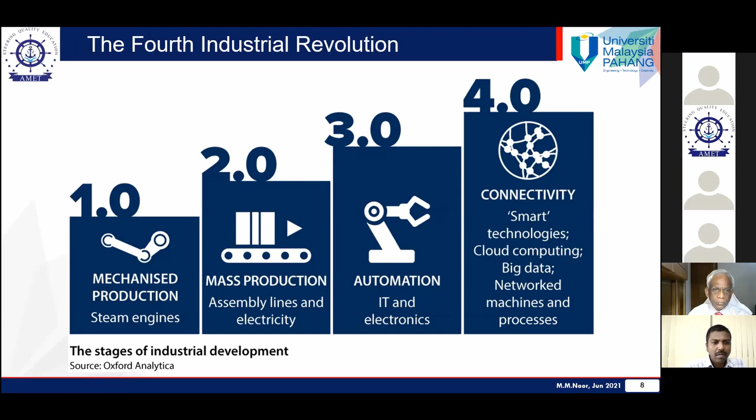An example of technology adoption: if we take a smartphone, it took about 3-4 years to reach 25% of the US population, which is about 300 million. But in old days it took about 30-35 years, like with electricity or the phone. That's technology adoption.

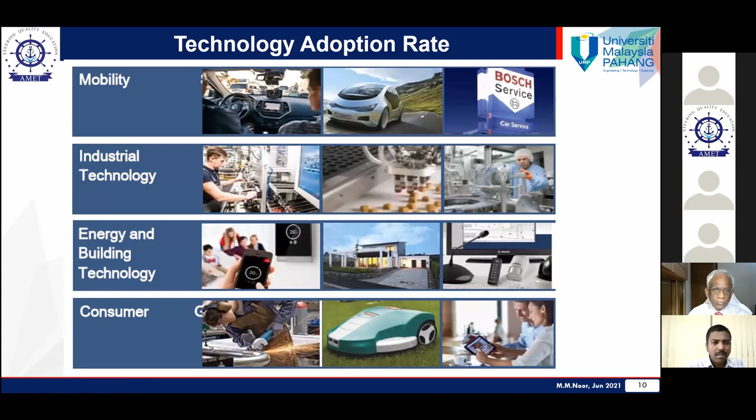Currently, what's next? We are on mobility, industrial technology, energy and building technology, and consumer technology. This is part of the important adoption of technology. The main focus in this area is how we can adapt to man-robot collaboration in our processes, central control, quality, component and material testing, and supplies. Because of this knowledge and engineering technology, we are here.

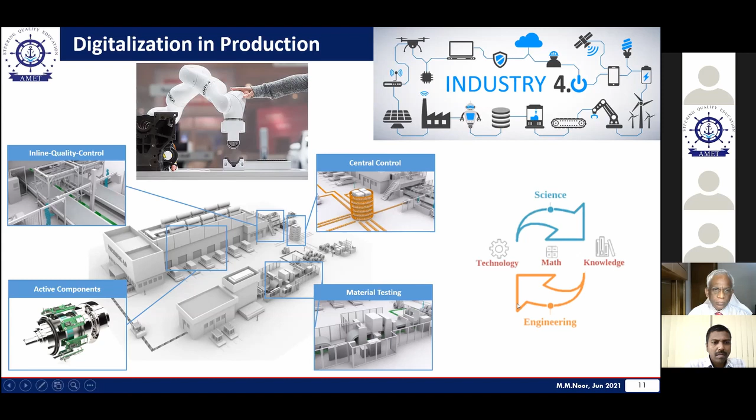Are we ready? Actually, we must be ready. By hook or crook, we must be ready. We are in mechanical engineering plus. Why do I say plus? Because we are not stand-alone. In our area, we have to be equipped with ICT and also artificial intelligence.

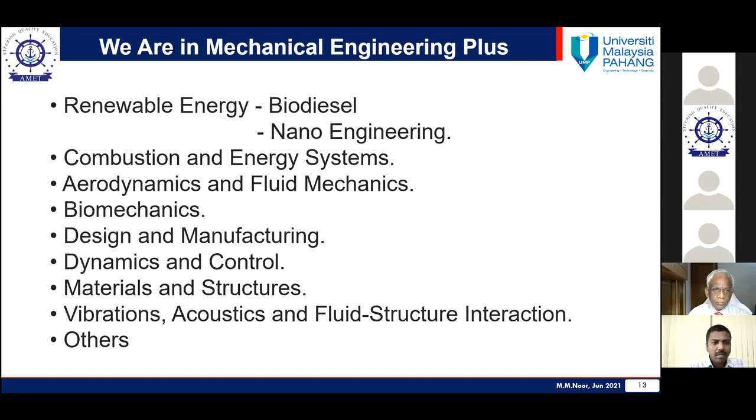Not only mechanical, but we have to equip as a team, ourselves and also our collaborators. Some of the important areas in our field are renewable energy, combustion, aerodynamics, design, and manufacturing. All of this is related to mechanical engineering.

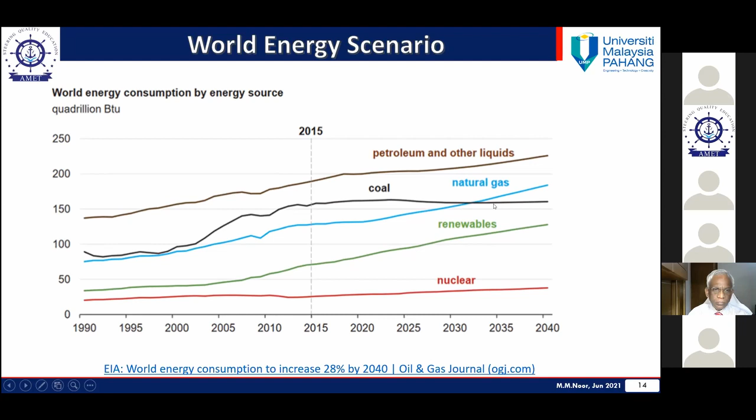Why do we need lean and clean? Of course, we have to have higher efficiency and lower energy supply to gain the best energy output. That's why we need it.

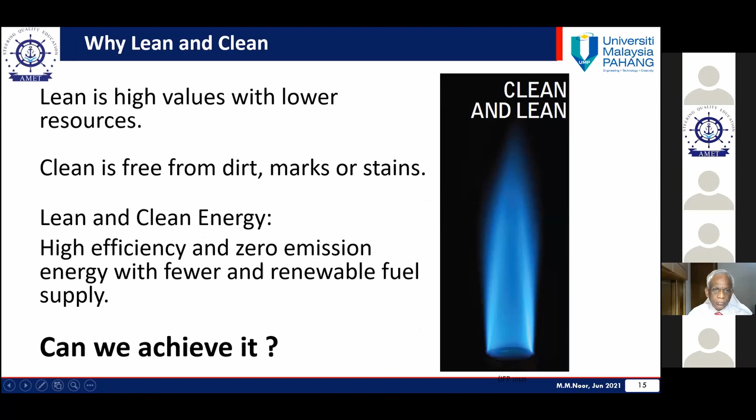And why do we need it? Because of greenhouse gases. In the normal case, the heat will be released, but with human-enhanced greenhouse gas effect, this happens because of methane, NOx, and also CO2. These three are most important, and the most dangerous is actually CO2, because we burn it and cannot convert CO2 back to oxygen enough, so it becomes emission.

I will specifically focus on two areas: biodiesel and nano materials. Just now I heard the Vice Chancellor also mention renewable energy and nano materials.

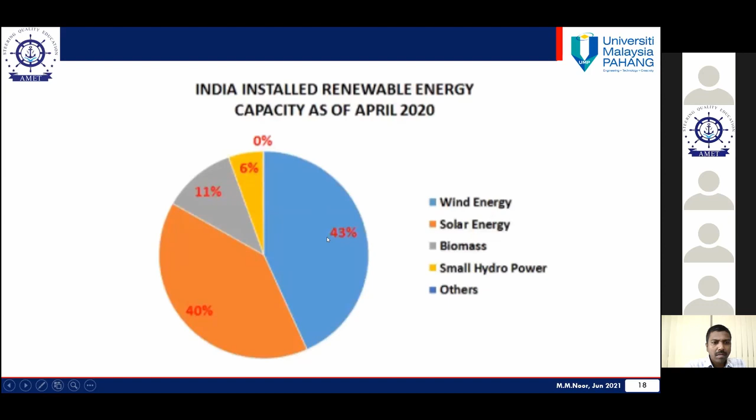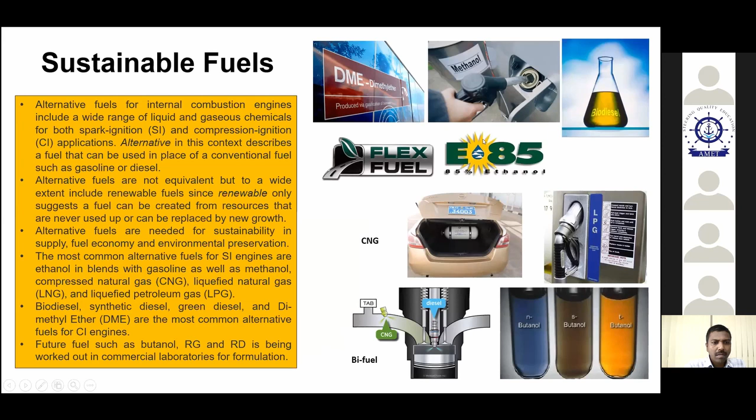Sustainable fuel: we have a few sustainable fuels that are now in the market and being developed. And here is some history.

In 1973, there was a spike in oil price; by 1974, the price went from $3 to $12 per barrel. You can imagine an increase of about 400%, four times. This changed transportation too—big engines became small engines. That was the effect, and this issue can still come back.

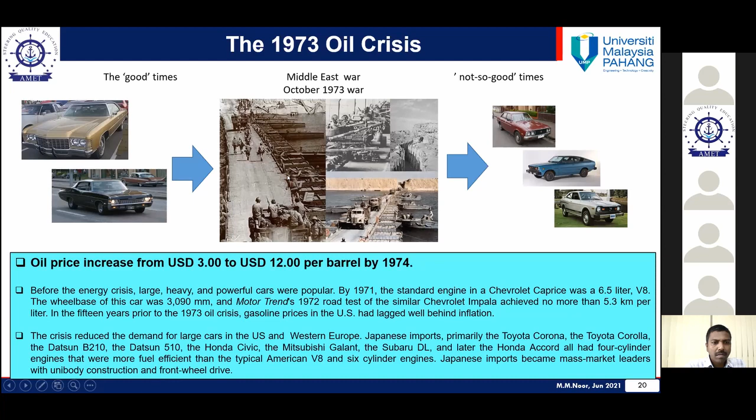This problem can come back because of a few things, for example war, or like now, the effect of viruses. If a virus affects fuel production, then fuel prices spike again. Renewable energy sources include solar, biomass, biogas, mini hydro, and solid waste.

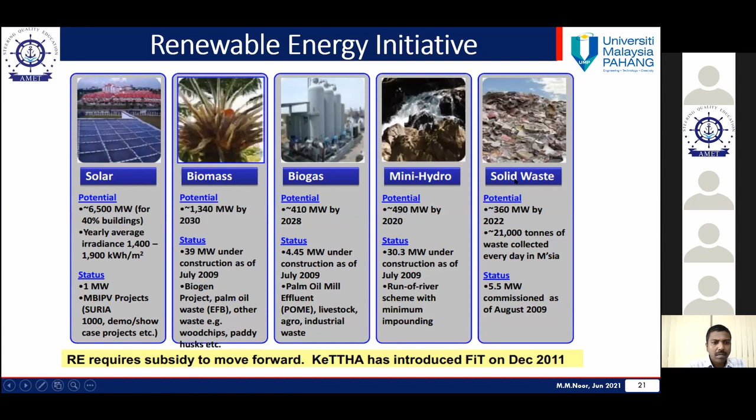Changing this part of the resources and sources—I want to highlight this. Really, one of the best sources for renewable energy is actually palm oil. We have a lot of land for palm oil, and I think India has already started on this.

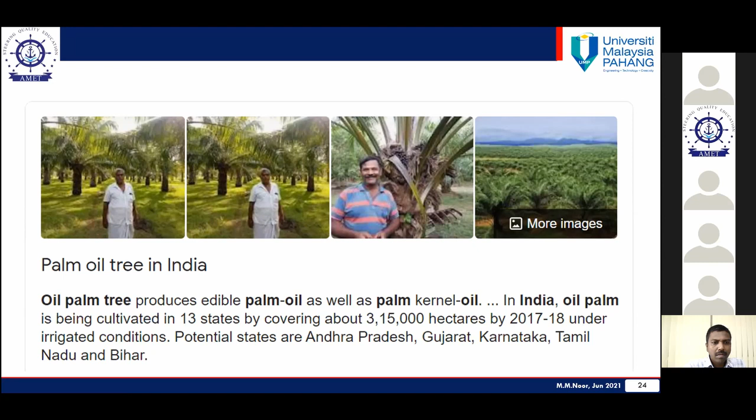This is getting bigger and bigger now, I believe, because it's good. Let me bring some data: palm oil uses only 5.5% of the acreage in terms of space, but in terms of tons per year, it is actually the highest. You can see palm oil here, for example.

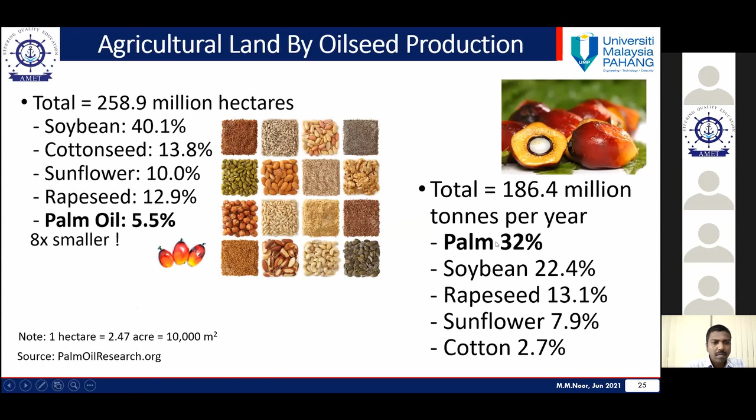And also, the price is actually the lowest among all the others. The hectare yield is actually 8 times compared to soybean, sunflower, and rapeseed. This is the palm oil example.

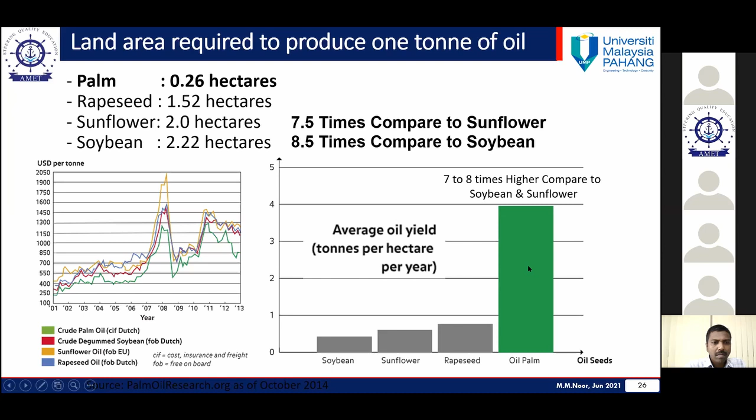On our side, as engineers and researchers, we have to study transesterification. With the non-catalytic method, we can produce ethanol and butanol, and with the catalytic method, we produce the end product along with energy.

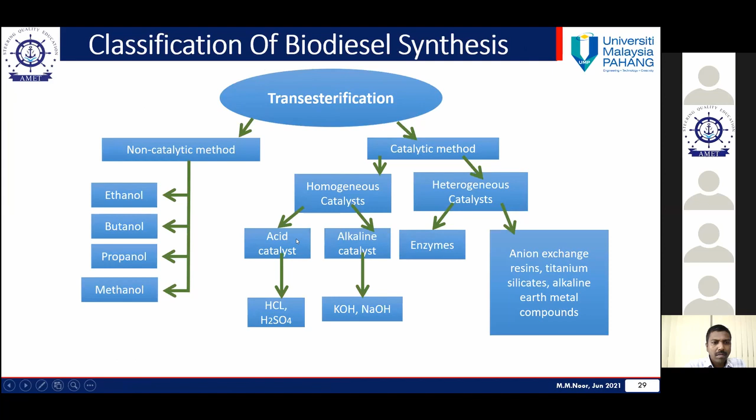Of course, there are some advantages: biodiesel is biodegradable. The disadvantage is slightly lower energy content, but not that much lower.

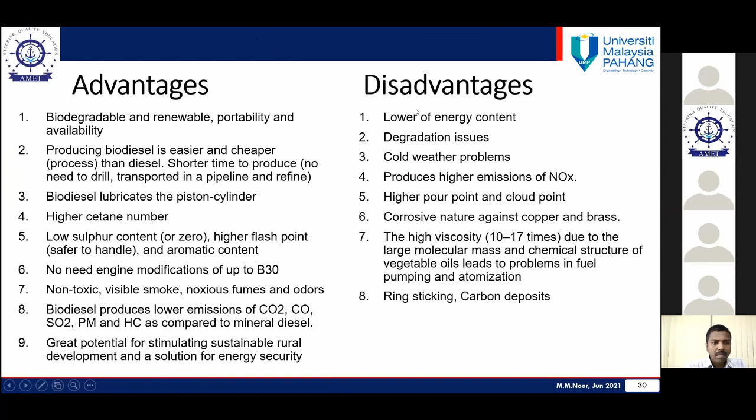Now, regarding nano materials, I'll use application in solar energy as an example in my speech. To fly an electric aeroplane, we need at least about 500 watt-hours per kilogram range.

This is the example of Tesla—they have already achieved a stable 250. If they increase it, or if any researchers in the world increase it to 500, we can fly using electric airplanes, or maybe electric ships as our transport.

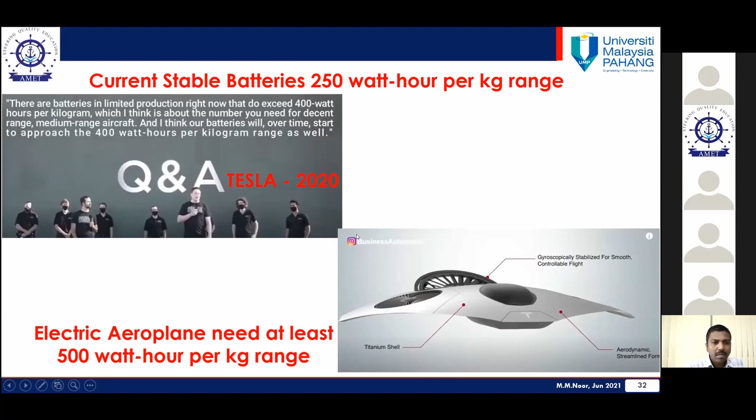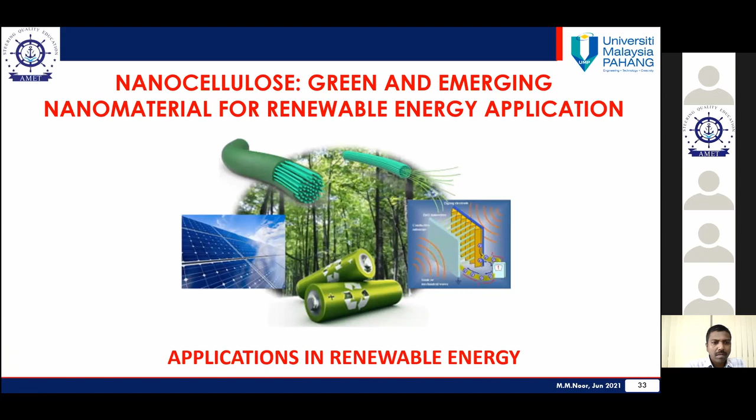Nanocellulose is very promising now in research—a green and emerging nano material for application in renewable energy. Let me give a short summary.

Nanocellulose can be applied in solar energy harvesting, energy storage, and also nano generator development. This is part of the current study.

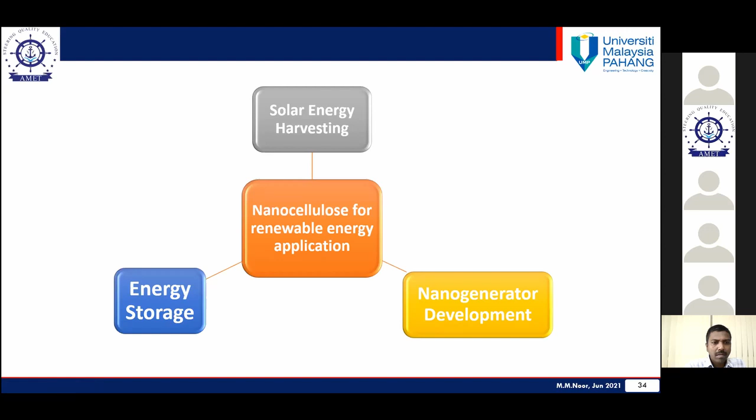Because of environmental issues related to waste, using this can lead to better waste management.

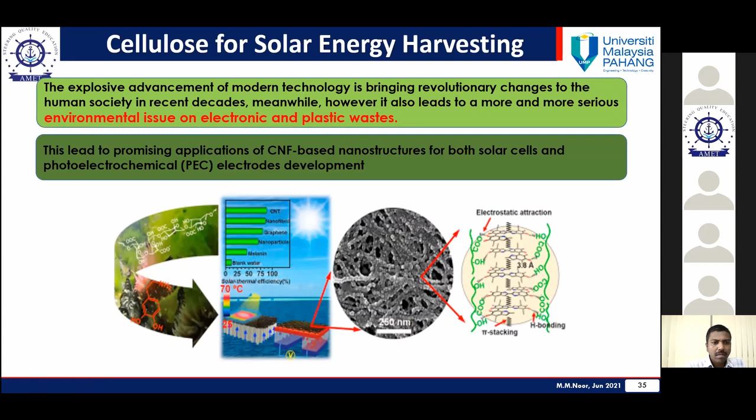Nano materials are good because they have a large surface area, and in normal application, nanoparticles with large surface area become very heat-efficient. If you put them inside fuel, it becomes good fuel; if you put them inside coolant, it becomes good coolant. Those are the properties.

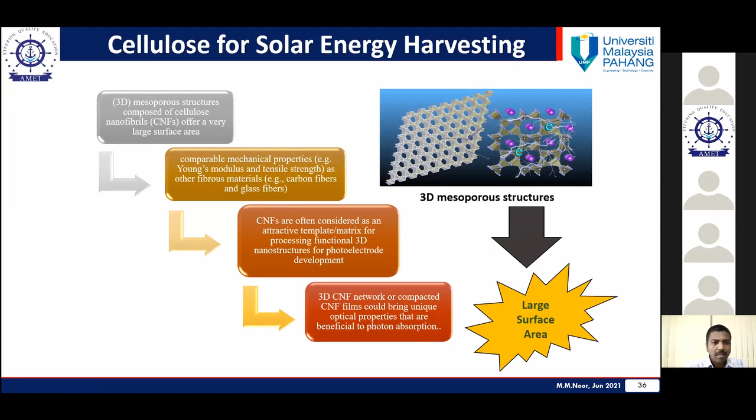And for other energy conversion, slightly moving on here—this is an energy roadmap for gasoline, diesel, and electricity up to 2050. Just an overview, for example, in engine history.

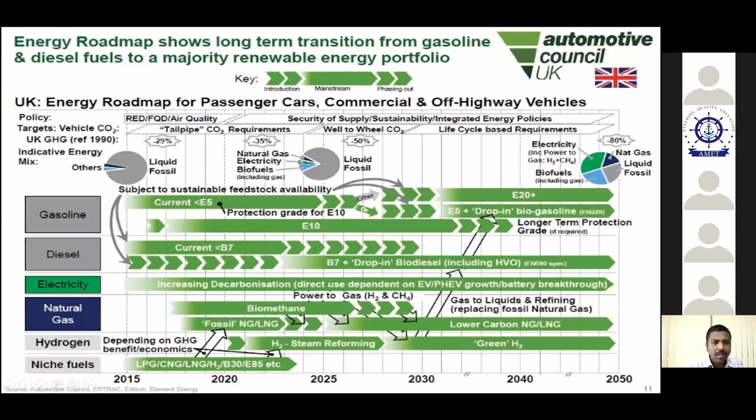Past engine is like this Ford T model engine. Present is more advanced. But for the future, we have a lot of study also on engine, even though electricity is there, the engine still needs to be enhanced.

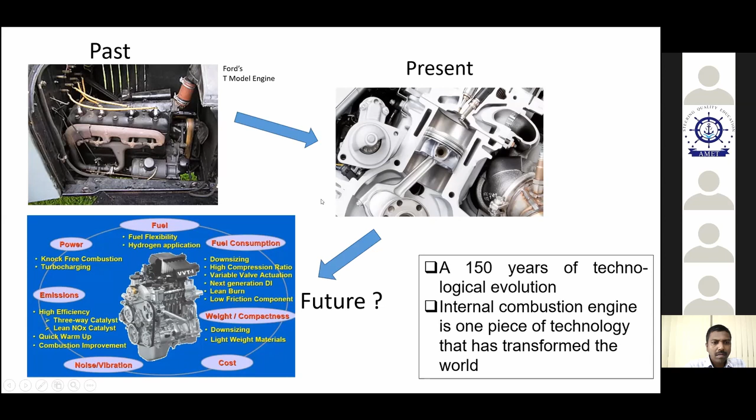Euro 7 will soon be announced as the emission standard by the Euro Commission, presented by end of 2021. I believe it will be more stringent for engine makers and for emission control.

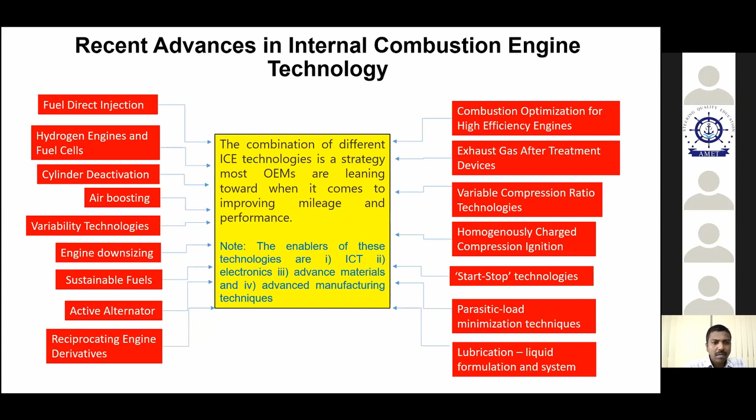Recent advances in internal combustion engine technology - this is an example of the many things, and I'll show you a few.

HCCI, as we know, the homogeneous engine becomes more stable, lower temperature, and also higher efficiency. But it's still on research.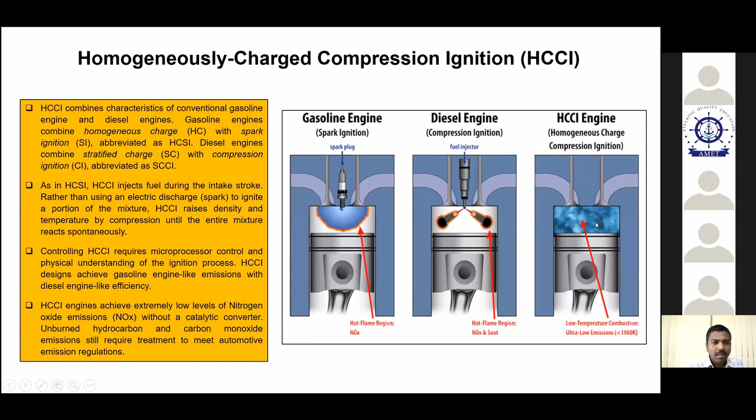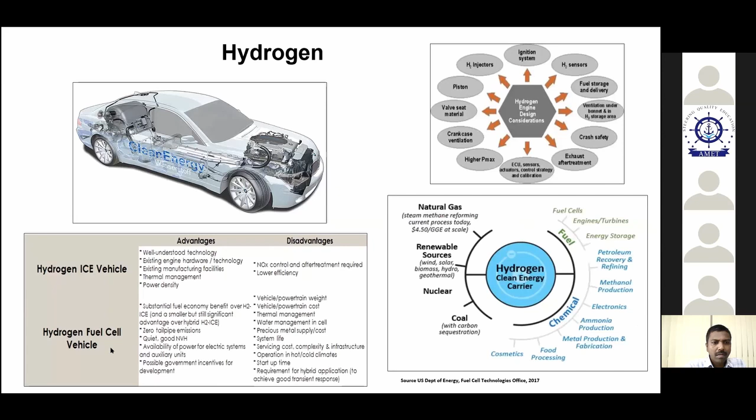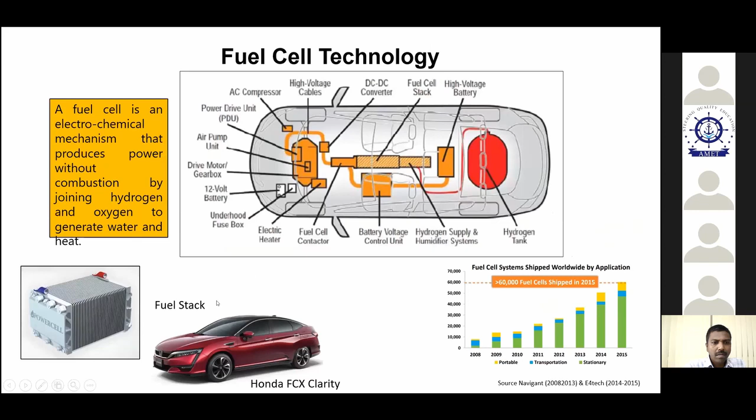Example, hydrogen itself - we have hydrogen internal combustion engine or hydrogen fuel cell. This is also on study. Fuel cell technology is increasing, and also electric vehicle.

Still we have problems on advancement of EV on batteries, structures, lightweight, driveline, sensor, safety. But still, we are coming up with more and more advanced solutions.

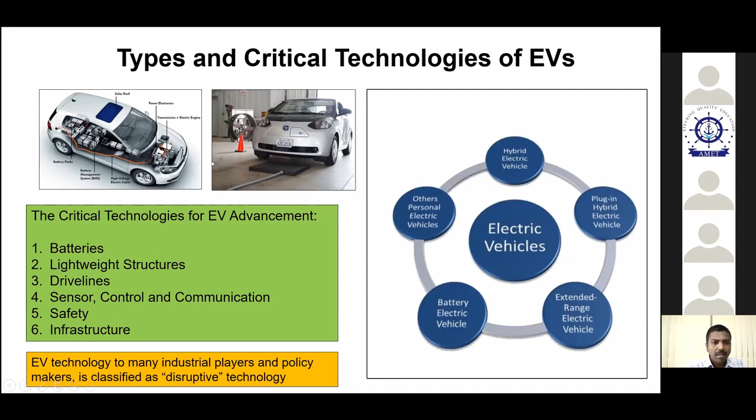If we do some short comparison between electric and gasoline: for electric, there's no tailpipe emission, because emission is moving from the town to rural area, but there's still emission. Gasoline produces greenhouse gases directly everywhere it's used.

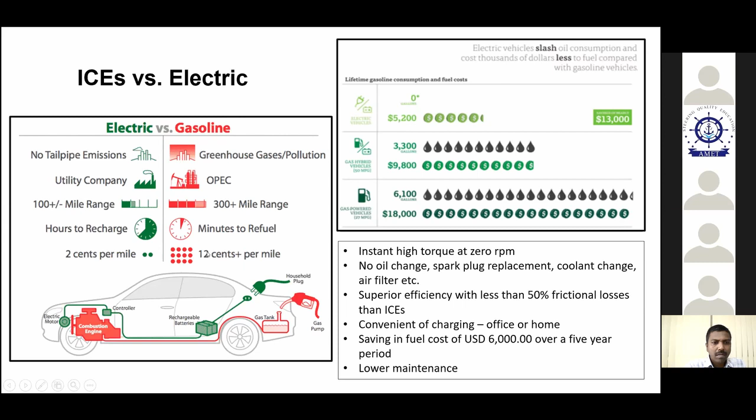Electric can go about 100 miles, gasoline can go 300-400 miles. To charge takes half an hour or 1 hour, but refueling is about 2-3 minutes or 5 minutes. Cost-wise, electric is very good at 2 cents per mile, but gasoline is 12 cents when efficient, up to 20 cents per mile when non-efficient.

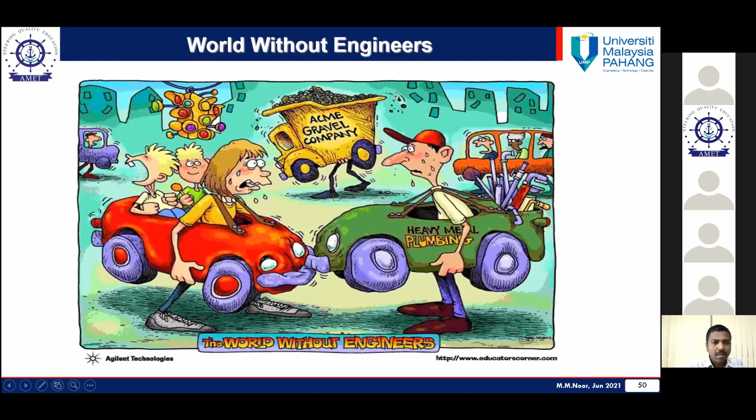In preparing for this challenge, as educators and researchers, you can see - if the world was without engineers, our transportation, our ships, our cars, our airplanes - this is unimaginable without engineers. Bridges, for example - we need engineers. We need Superman engineers. We are all engineers.

If we take this change in skills - mechanical engineers I take on technical skill plus complex problem solving. These two have very high commitment and are very important skills in demand in 2020.

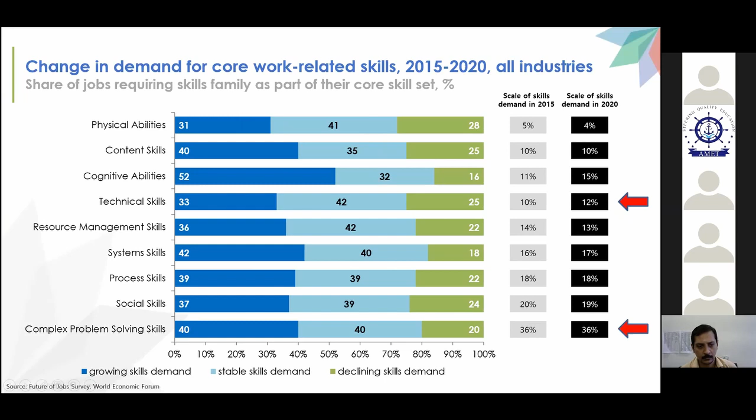That's important. Some say in order to produce qualified graduates, curriculum needs to be oriented and adapted to current needs - example, coding, artificial intelligence, big data. We have to adapt this for mechanical engineering graduates. The quantity or volume is up to everybody, but small or big, we have to do it.

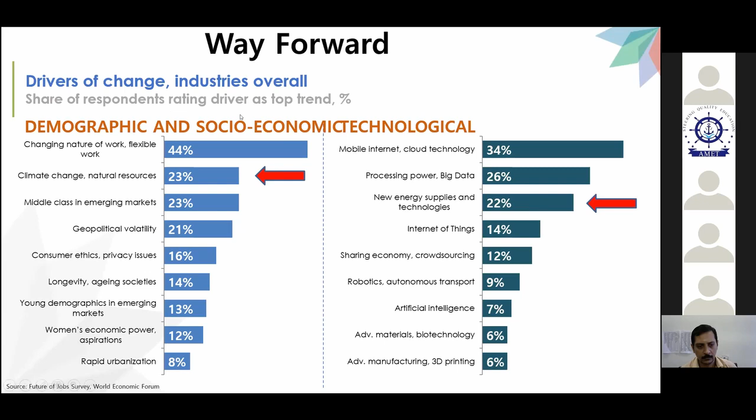It's important for us to calibrate and collaborate. Renewable energy is very critical in research for the nation and the world to survive, especially in energy consumption. Also the role of policymakers in promoting renewable energy, funding and facilities.

What we can do as a university is be ready for the challenge - sooner or later, we have to be there. As researchers, individually or as a team, we must embark on this research. Application is of course automotive or shipping, but we have to be there. Finally, we have to remember the sustainable development goals and cater to the areas related to us.

This old guy, I think everybody knows him - Albert Einstein said... I didn't like him, but I like the words he said: once you stop learning, you start dying. That means no matter what age we are, we still have to learn, if we cannot read and write. Thank you very much.